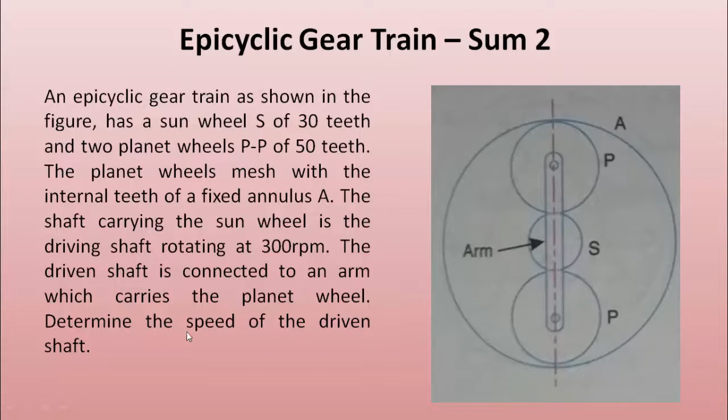The driven shaft is connected to the arm, this arm. So we have to find the speed of the driven shaft in this question. Okay, so here I have just created the animation of the sum that we are seeing in this question. As you can see over here, this is the sun gear. These are the two planet gears, and this is the arm that is connecting the two planet gears and the

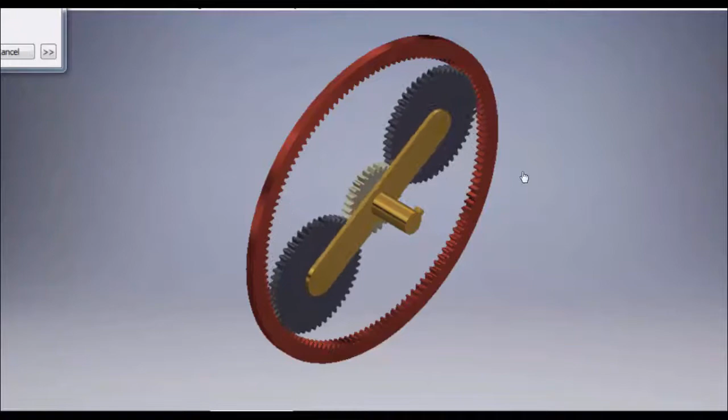sun gear. The red color thing that you see around this, this whole red color thing that you're seeing, it is your annular gear. As you can see, the annular gear is fixed, whereas the other three gears are rotating. And as they are rotating, the arm itself is also rotating. So your arm is your output shaft and your sun gear is your input shaft.

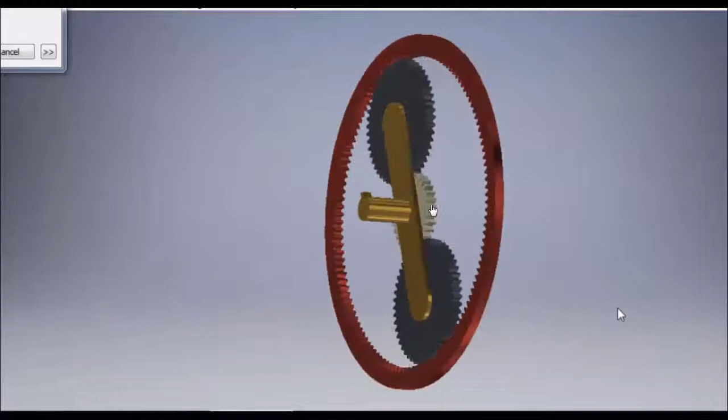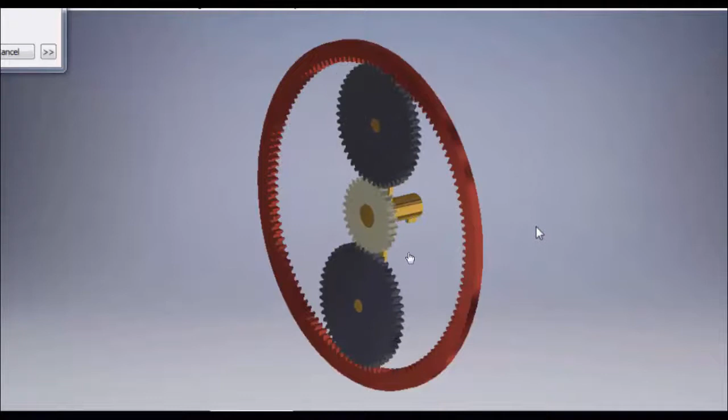So in actuality, there will be a connection over here which will rotate the sun gear, and because of this rotation of the sun gear, the planet gears will rotate, and because of the rotation of the planet gears, the arm will rotate, and the output shaft is connected to your arm. So this is how your sum is actually going to work in real life.

This is the second sum on epicyclic gear train that we are solving. In this epicyclic gear train, as you can see, there is a sun gear and two planet gears and an annular gear. And they have told us that the annular gear is fixed. That is, NA is 0. And they have given us that S has 30 teeth and the planetaries have 50 teeth. And the RPM of the sun gear is 300. We have to find the RPM of the arm.

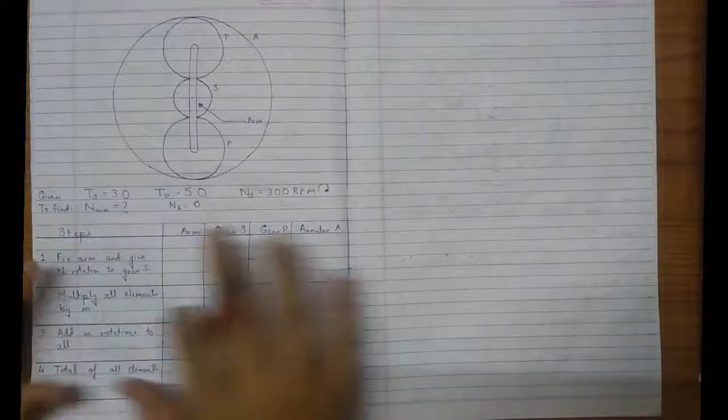Again, I have pre-drawn this table. You have to draw this in the exam. I explained it in the last sum also; I will re-explain it this time also. So first of all, you have to write steps. Then you have to write all the elements that are present in your diagram, and the first thing should always be an arm. In any epicyclic gear train, there will always be at least one arm. So you have to write the arm first.

This is our arm. Then it is our sun gear. Then we have two planetary gears. But both these planetary gears are going to perform the same motion. Their RPM will always be the same and in the same direction. So it is not necessary to write the planetary gears twice. We can write it only once. And then there is the fixed annular gear on the outside. It is given in the question that it is fixed.

So what is the first step? The first step is always fix the arm and give +1 rotation to any gear. You can give +1 rotation to S, P, A, whichever one you like. But to make our job simpler, we will give it to S. The answer will not be affected by which gear you are giving +1 rotation to.

So if we are fixing the arm, it means RPM of arm is 0. RPM of S is what? +1. Again, I will say plus means anti-clockwise direction. You have to remember.

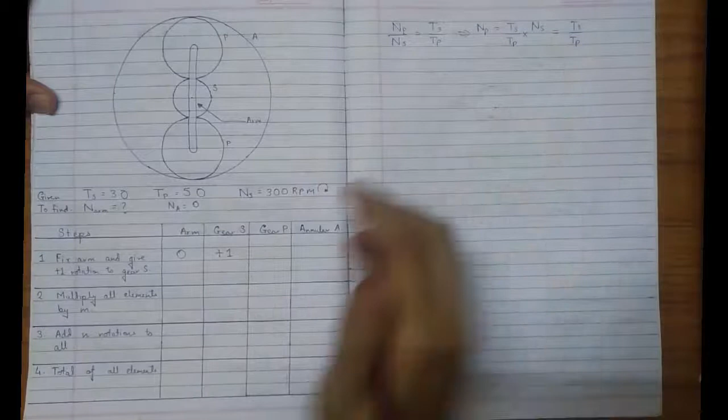But these are externally meshing. Whenever they are externally meshing, the direction is going to get opposite. In this table, direction is also important. So here it will not be TS upon TP, it will be minus TS upon TP. Remember, whenever there is external meshing, these teeth are meshing with each other, external to gear S, external to gear P. Hence, it will be minus of whatever we get over here.

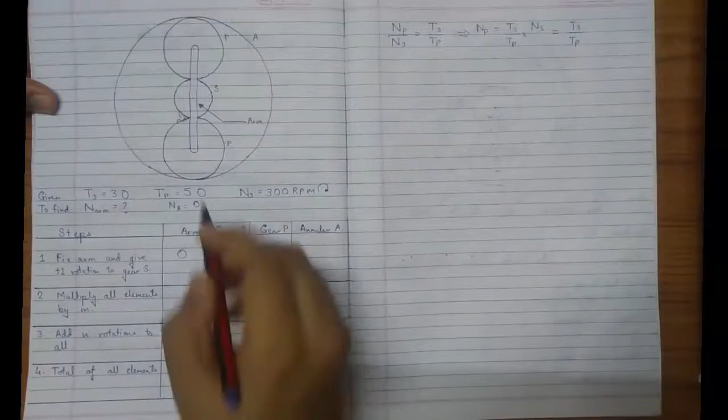Now, let us look at what will be the RPM of the annular gear. P is meshing with annular gear, and in this case, it is internal meshing. We will look at that afterwards, but just see that P is meshing with annular gear A. So how can you find out the RPM of annular gear A? NA upon NP is equal to TP upon TA. So to find the RPM of annular gear, it is TP upon TA into NP.

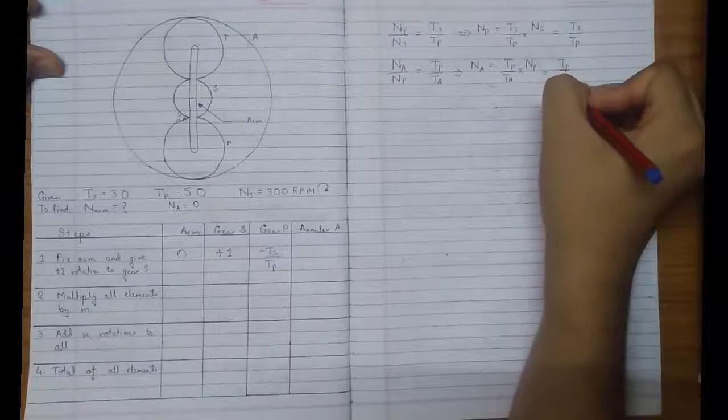And what is the value of NP? We just found out the value of NP: minus TS upon TP. So we'll put it over here. So it will be TP upon TA into minus TS upon TP. TP will cancel. It will give us minus TS upon TA.

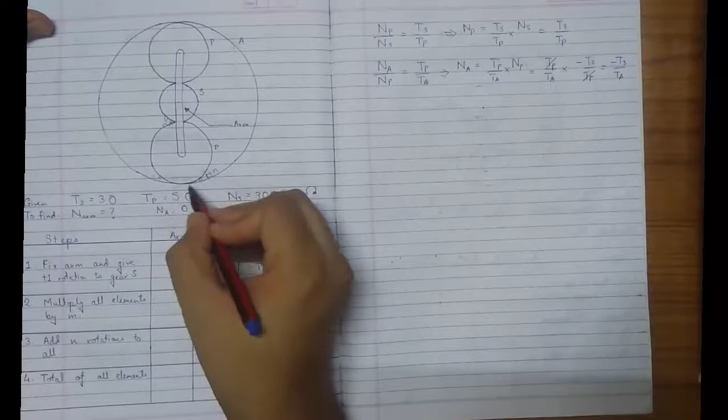But see, it is an annular gear with internal gear teeth. So this meshing is internal meshing, not external meshing. In internal meshing, both the gears will rotate in the same direction. So we will not oppose this sign; we will keep it as it is. We will write it as minus TS upon TA. Why? Because it is internal meshing. Why did we change the sign earlier? Because it was external meshing. In this case, because it is internal meshing, we have kept the sign the same. So with this, our first row is complete.

In the next row, we have to multiply this first row by m. So 0 multiplied by m is 0. 1 multiplied by m is m. This will be minus m TS upon TP. This will be minus m TS upon TA. Next step, we have to add plus n rotations to all. So plus n, plus n, plus n, plus n.

The sum will come out to be: this will be n, this will be m plus n, because 0 multiplied by m is 0. This will be n minus m times TS upon TP, and this will be n minus m times TS upon TA. So we have completed the table. Always remember, for an epicyclic gear train, you always have to complete the table first. After completing this table, now we can put in the conditions.

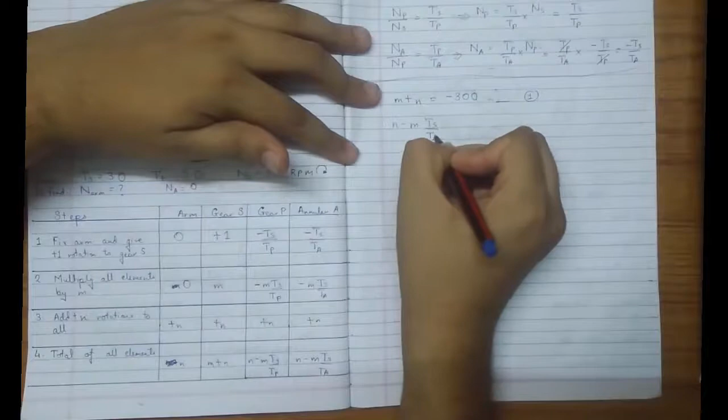What is the value of TS? TS value is 30. What is the value of TA? Well, the value of TA is not given to us. Okay, no problem. We can find out the value of TA. So first we have to find the value of TA. Now to find the value of TA, we will have to use geometry.

Okay. So if you look at this question, see, this is complete radius of A. This complete is the radius of annular gear A. So radius of A, it is equal to what? Radius of S plus diameter of P. Radius of A is radius of S plus diameter of P.

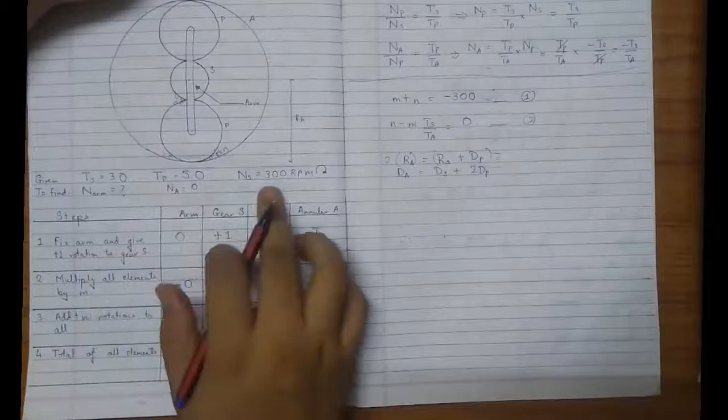Okay, so multiplying both sides by 2 to convert it into diameters. So diameter of A is diameter of S plus 2 times diameter of P. Now here see, they haven't given any value of module. Module is not known to us, but it doesn't matter. Why it doesn't matter? See, what is the formula for module? Module is PCD upon number of teeth. So diameter becomes module into number of teeth.

And as I have told you again and again, the module of meshing gears is always same. So module of S will be equal to module of P because S and P are meshing with each other. Again P is meshing with A, so module of P will be equal to module of A. So module of S is equal to module of P is equal to module of A. We can call this common module as M itself. Okay, so DA, the PCD of gear A, becomes module into number of teeth on gear A. So DA becomes M into TA because module is constant for all meshing gears.

S is meshing with P, P is meshing with A, is equal to, for S gear, it will be module into number of teeth on the sun gear plus 2 times module into number of teeth on the planet gear. Okay, so this becomes M into TA is equal to M into TS plus 2M TP. M can be cancelled because it is same. So TA is equal to TS plus 2 times TP, right?

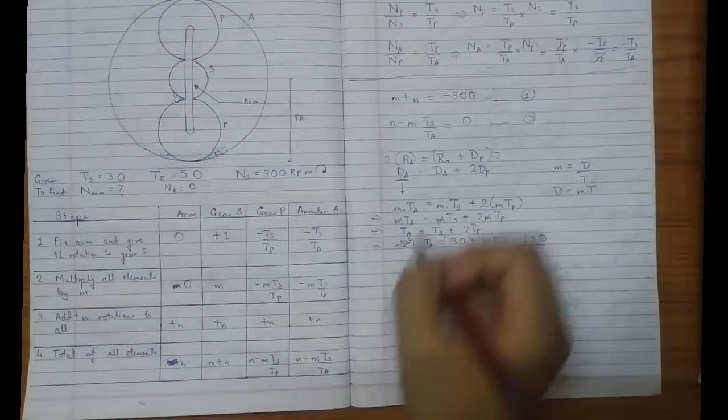Okay, so these become our two equations. What is the first equation? This is the first equation. We can write like N plus M is equal to minus 300. The second equation becomes N minus 30 by 130 M is equal to 0. No need to find this out. We can directly put this in the calculator. Okay, so we will solve the two equations. First equation is this: N minus 30 divided by 130 M is equal to 0. Second is N plus M is equal to minus 300.

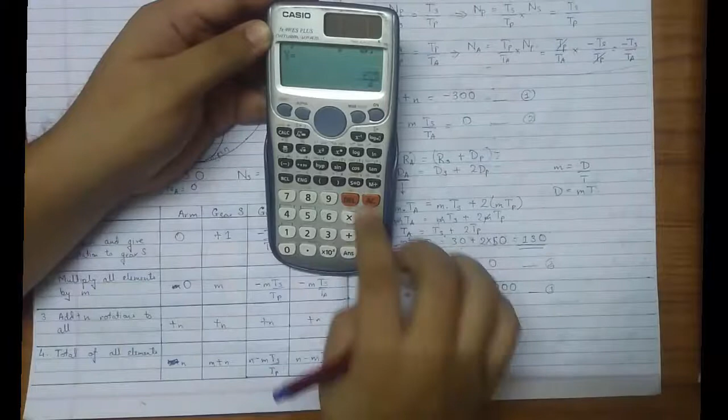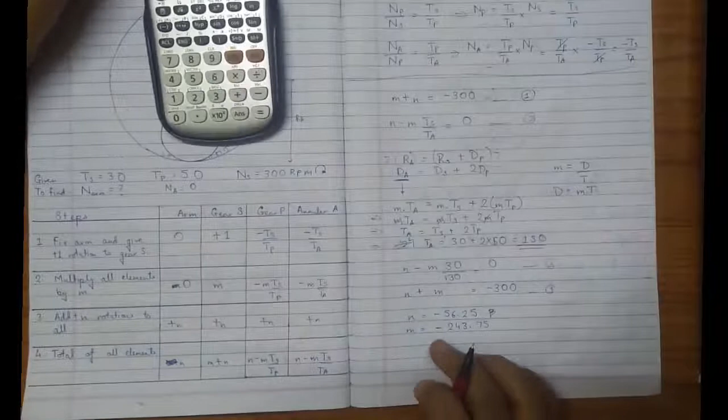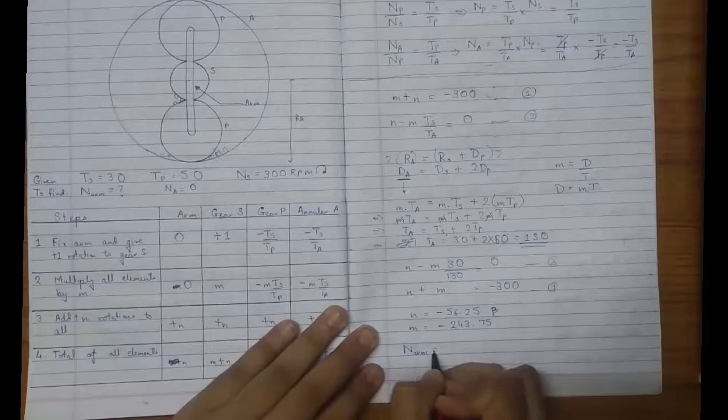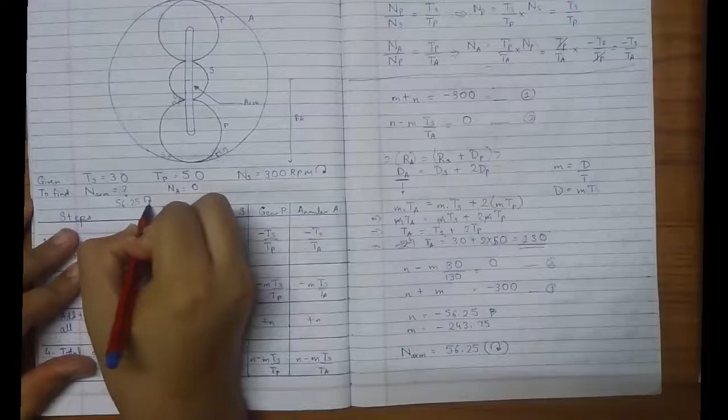Okay, so the value of N is minus 56.25 and the value of M is minus 243.75. These are the values of N and M. What have they asked us to find? What is the RPM of the arm? It is equal to N. What is N? Minus 56.25. Minus means clockwise. Means RPM of arm is 56.25 in clockwise direction. Okay, so RPM of arm becomes 56.25 in clockwise direction. This becomes our final answer.